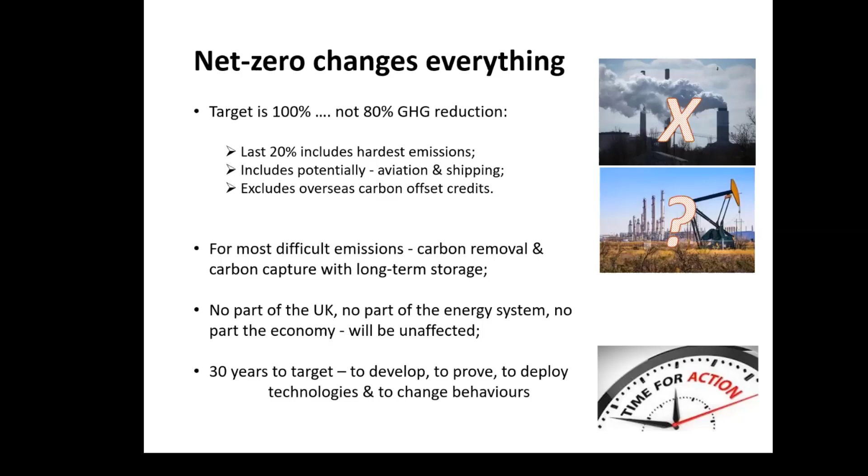And when we talk about the timescales, people want us to act on the timescales of 10 or 15 years. 30 years is not long to act when you get down to it and consider what needs to be developed that's new, what needs to be proven before it's deployed, the scale, the range and cost of the deployment, because it's across the whole economy, and what will be required to change people's behavior. So let's just look at the nature of the problem. A few facts and figures: we've made much progress.

The greenhouse gas emissions, this is all the emissions, but put in terms of million tons of CO2 equivalent, have been reduced by about 44% since 1990, when we started counting these things, from about 800 million tons to the current 450 million tons. The old target was an 80% reduction, about 160 million tons of CO2 equivalent. The new target is net zero. That means either no emissions, or where there are emissions, having countervailing emission removal, where you have negative emissions to balance this off. So this is a really tough target. There's no margin, there's no bit at the edge. It means zero, and for anything that's left, some negatives.

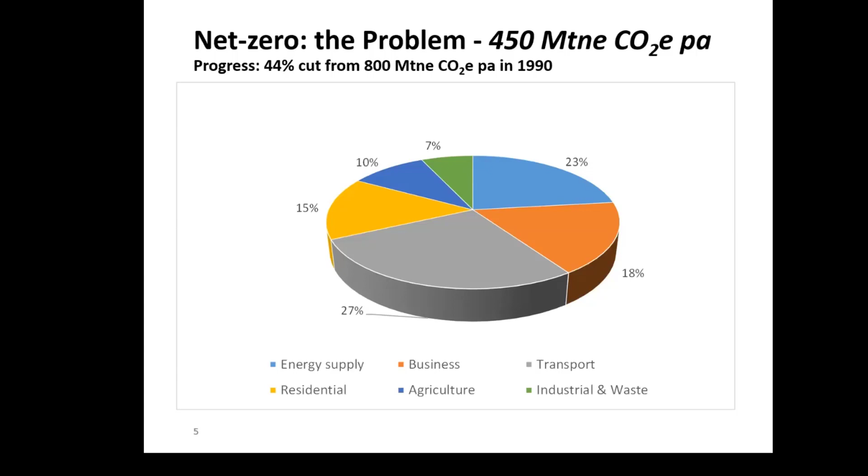So let's just look at some of the sectors. The largest sector, in terms of emissions, is transport, which is cars and lorries and planes and ships and trains. This is the largest, and when people say we'll fix this with electric vehicles, there's a little bit more than electric vehicles to fix. The next largest is energy, which these days is mainly gas. Huge, still about 50% of our electricity is from gas, and this emits CO2. Industry, very important area, because some of the most difficult problems are in industry. Some of the process industries are quite difficult. And here's a picture of a cement making process. Quite a difficult area to fix.

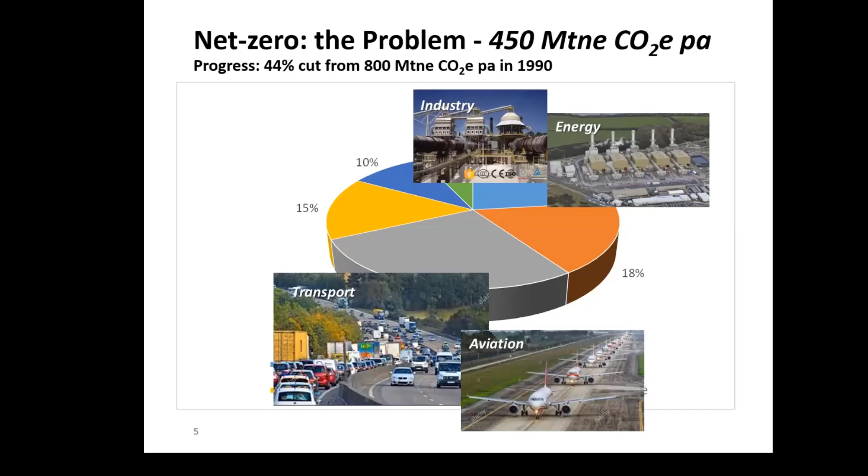There's all the electricity we use domestically and the gas we use domestically and in commercial buildings. These two together add up to a very large amount. It's important, not just electricity, but the heat that's involved in those. And then let's not forget agriculture. Agriculture has emissions as the famous methane from cows, but also fertilizer, and also tractors and transport and heating and all the processing that goes with it. So agriculture is also a big affair. So net zero applies to all those. It's not just about electricity. It's a very big subject.

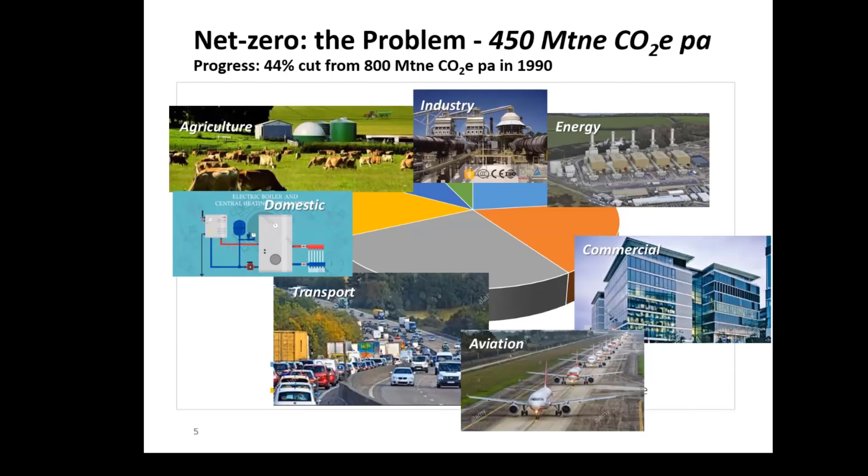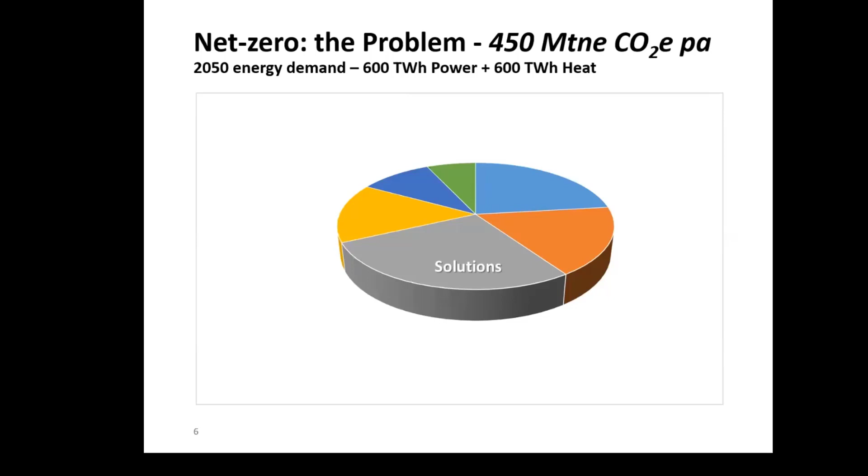Luckily, we have some solutions at hand. It's not all doom and gloom. We have a palette of technologies available, much talked about: hydrogen as a possible carrier of energy, which can be made by electrolysis, splitting water, or by steam methane reforming, which is effectively splitting methane. So there's a large-scale industrial process which is possible.

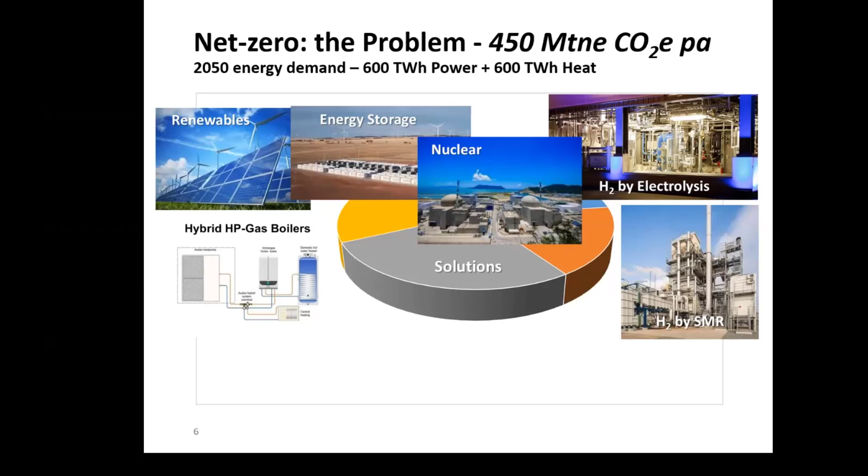There's renewables, talked about today, solar and wind, and probably energy storage, and nuclear is another clean energy source. For heating, heat pumps need to be thought about, and gas boilers, perhaps replacing gas boilers with hydrogen. And then for transport, the famous electric vehicles. And then what are we going to do for trucks and trains? People advocate we should have hydrogen trains or hydrogen trucks or electric. So this will progressively affect a large area of the economy.

So what do we expect 2050 to look like? First of all, energy efficiency measures will be widespread and successful. We need all of our power from clean sources. Natural gas will be replaced by hydrogen or heat pumps. Surface transport will become either hydrogen or electricity. Ships will be powered by ammonia or hydrogen, and bio or synthetic fuels for aviation. And CCS will become important for specific industrial processes.

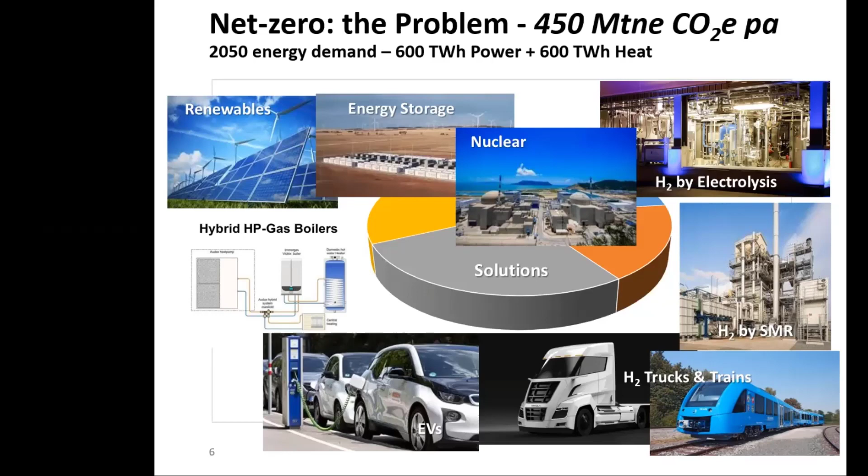This is too big a topic to talk about this evening, but I want to talk about three what I call strategic challenges, where there are quite big questions that need to be answered, the future is not quite certain, and they need some evolution and some decision making. The first one is about heating and hydrogen. The second one is about the role of carbon capture and storage. And the third one is how do we keep the grid reliable with lots of renewables. I'm going to go through each of these in turn.

So first of all, heating and hydrogen. Hydrogen is a front runner, both for heating and for transport, to replace oil and gas. The question is, how much of it do we need? We know it's a flexible energy carrier. It needs to be made. This requires energy, and it needs to be transported.

Potentially, we can make use of the gas grid where it is plastic lined, but it will require some changes to the local infrastructure, which is not all plastic, and definitely into the houses, and then changes to appliances where it is burned. This means digging up many, many roads. It means changing tens of millions of homes and offices. But it looks like this is a feasible thing to think about.

The current UK hydrogen production is about 27 terawatt hours. We usually talk about kilowatt hours or maybe megawatt hours. Electricity bills are in kilowatt hours. 1,000 megawatt hours is a gigawatt hour, and 1,000 gigawatt hours is a terawatt hour. So we're talking about a million megawatt hours. Currently we make quite a lot of this by the industrial process of steam methane reforming, mainly on Teesside at the old ICI place.

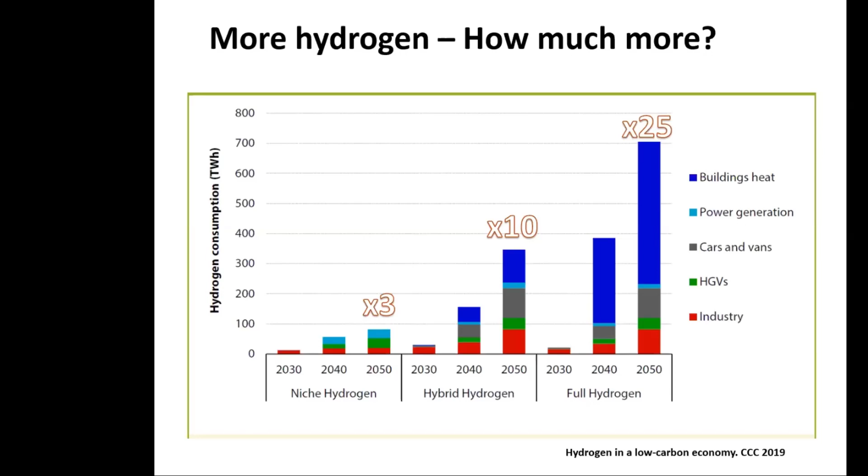A rather complicated slide here, but it intends to make a point. Heating is the biggest use of energy. In the future, it'll probably be about 600 terawatt hours, half the total energy use. It's a big number, and it's a big carbon producer at the moment because it's nearly all natural gas. So how do we do the heating job? Well, there are 3 choices: so-called blue hydrogen, green hydrogen, and heat pumps. Let me briefly go through each of those.

Blue hydrogen is taking natural gas and breaking it down in a methane reformer, heating the natural gas up and injecting steam at several hundred degrees centigrade with a catalyst, and it breaks down to CO2 and hydrogen. It's about 70% efficient. We know it works, and we know how to do it. It can be supplied through the gas grid.

It can be used for transport power, but needs some cleanup because, particularly for fuel cells in transport, they don't like methane. But it does require carbon capture and storage, because otherwise you have exactly the same CO2 emissions as you would if you burnt it in the house.

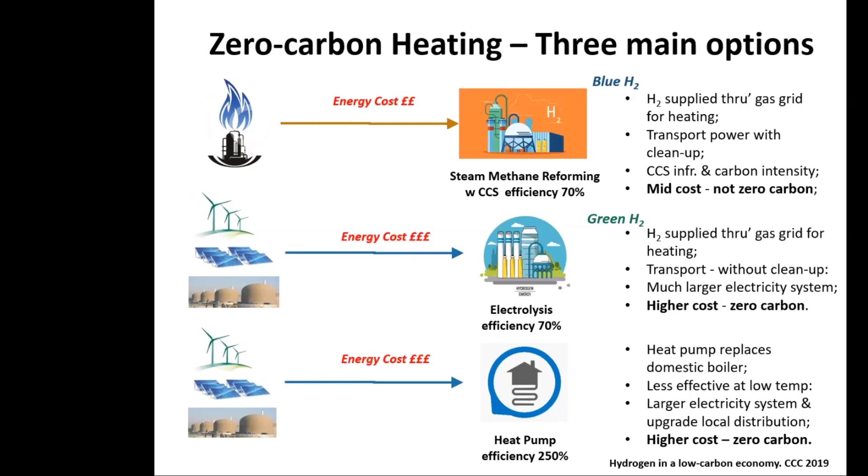Now, the real question is, there's these three ways of doing it. I don't think there's anything novel in this. People will agree these three ways of doing it, but we do need to decide because it has an effect on the infrastructure. Are we going to dig up the roads to put new cables in? Or are we going to remove all our substations to put more power into houses? Or are we going to dig up the roads to put new hydrogen pipes in? Are we going to do both of these things? And who's going to invest in all these infrastructure changes unless there's some clarity about what the right solution is? So that's the first thing to be thought about.

Secondly, carbon capture and storage. Again, people talk about this and are very enthusiastic about it, quite rightly, but it has its problems. So I think net zero, achieving net zero, will depend on having carbon capture and storage. Perhaps not in the way that many people think about it. It will definitely be required to remove and balance difficult greenhouse gas emissions.

The graphic here shows the general form of it, that in this case, what we call post-combustion, so you have CO2 in the output of some power plant or industrial plant in the flue gas. It's then captured by some process, some reversible process, which captures the CO2. The CO2 is then stripped up from the reagent that captures it, pumped up to high pressure, transferred and stored underground.

It's a well understood process. It's not a new process. However, it's got quite a number of steps. There are basically three main applications for carbon capture and storage.

There's direct air capture, which is taking the 400 parts per million we have in the air and capturing it and putting that underground. This is directly acting on the past history of climate change. There's bioenergy carbon capture. This is burning a natural fuel which has already got carbon that's been grown in naturally, which is captured from the atmosphere. They're called BECCS. And there's carbon capture for normal energy back on the back of gas turbines, on the back of steam methane reformers.

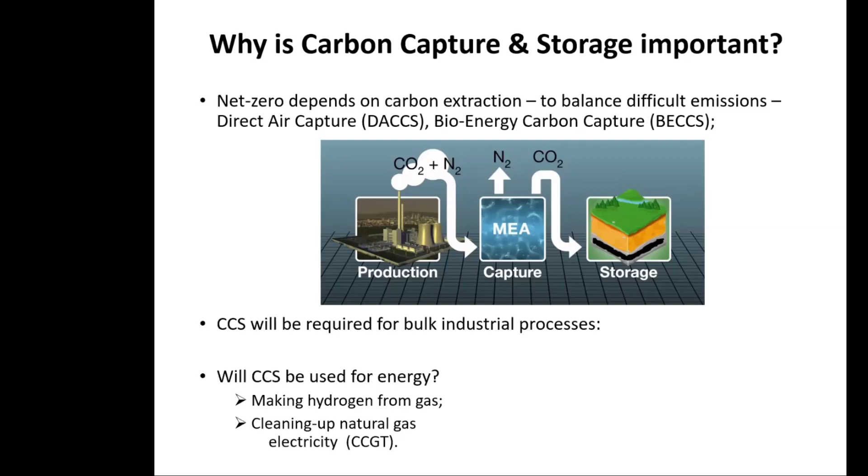And the real question is, will it be used for later use, making hydrogen from gas, or cleaning up the natural gas power? Now in the UK, we have a slightly tortured history with CCS. We've tried, some projects have started and stopped and started and stopped. But there are some examples of this around the world.

There's about 22 large CCS projects. They're mostly, and this is a picture of one in Texas, Petra Nova. It's on the back of a coal-fired power station. And they've got the wonderful ways of having captured the CO2. They put it back into the ground, into oil wells to drive out more oil. So it's called enhanced oil recovery.

And therefore, this looks economic because it's a retrofit of a plant and it produces more oil. But it's not really a net zero technology, because we wouldn't be burning coal in the first place. And secondly, we don't want to get more oil out of the ground.

Many more are being planned in a number of countries. And the current performance of these plants is they get about 85 or 90% of the carbon dioxide out of the plant. There's a theoretical possibility of getting some more, and with a completely different process of capturing it before you burn it, such as the Allam process, you can perhaps get as much as 100%.

But the main issues for carbon capture and storage are cost and residual emissions, as you might expect. Currently, the cost of adding CCS to a gas turbine puts the energy cost up by about 40%, and it's slightly more if you're talking about the Allam cycle. But importantly, if you put CCS on a biomass plant such as Drax, which burns wood pellets, the cost has been estimated by BEIS to be very much higher, perhaps 200% more than this. So that's a cost problem. They have a cost problem.

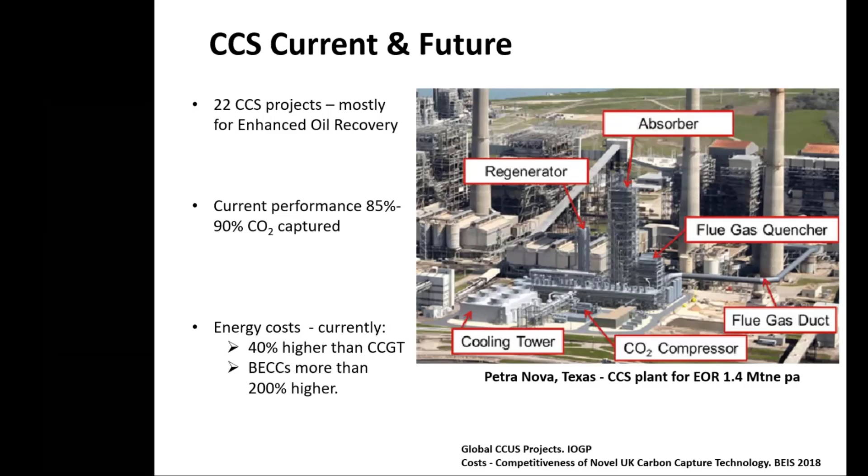Now to perhaps explain the other one, the residual emissions. They come in two parts, but here's a nice little graphic from the Climate Change Committee. On the left, this is using CCS associated with producing hydrogen with steam methane reforming. And on the left, you have the intensity of natural gas, and if you do no CCS, it produces about 200 grams of CO2 per kilowatt hour.

And then there's a funny box on the top, and that is what they call the upstream emissions. They're mainly methane, but methane has a very strong global warming effect, and the small emissions of methane push that up to about 250. If you put carbon capture in this system, it will bring down the process emissions to figures like 25 or 50 grams per kilowatt hour. So it's a big change, but those upstream emissions then become key.

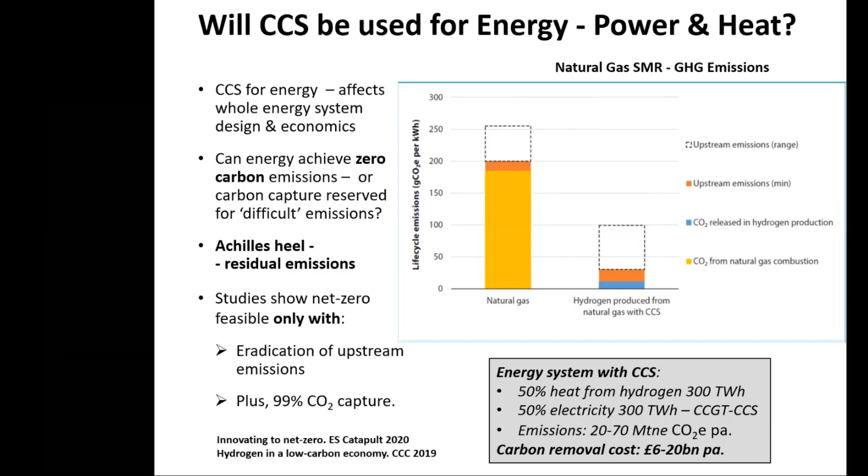These residual emissions are the Achilles heel in a system where, because there are other hard-to-abate emissions in the economy, the energy process will have to be zero carbon. Studies have shown that if we want net zero, it's only feasible if we completely eradicate these upstream emissions and we get to 99% carbon capture. And that's not currently where the technology is.

So thirdly, windmills and solar. On the basis that 2050 electricity supply is completely carbon free, we can see why the government has made its aim for the UK to be the Saudi Arabia of wind. We have plenty of natural wind resources, and it is, at least at the point of production, carbon free. Also, the falling prices of wind and solar over the last 10 years mean it's highly investable, it's becoming cheaper and cheaper, and it will become the dominant means of supply just because of market forces.

It seems that to meet the demand for energy in 2050, we'll go from wind being about 20% of the current energy demand to about two-thirds of the larger energy demand which might be present then. This is probably a seven-fold increase. Instead of figures like the current target of 30 gigawatts of wind going up to 40 gigawatts, as announced by Boris today, we'll probably actually need about 100 gigawatts of wind and 100 gigawatts of solar to meet two-thirds of the power requirement then.

But these are promising technologies. We have demonstrated them at scale. There are some challenges in those. We know demand varies, we know supply varies because it's weather dependent. We've got the issue of lack of coincidence in time of supply and demand, and the issues of grid stability, to do with what's going to stabilize this system. These are largely going to be replaced, or may turn out to be inadequate. For short term, we currently have spinning reserve of turbines, CCGT and nuclear turbines. If we're not going to have gas and gas turbines, that spinning reserve will go.

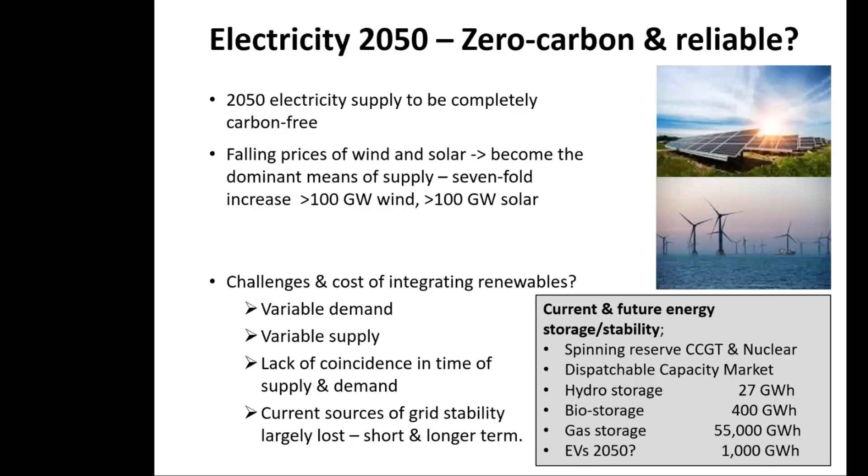People say, well, what about electric vehicles? If we make use of a portion of the energy from all the electric vehicles in 2050, it's about 1,000 gigawatt hours. I don't think this is going to be enough. So I just want to deal with these two issues: the mismatch of time and the business about the weather.

This is a chart which we produced as part of this Royal Society work, and it's quite instructive because it's not a problem we can avoid. So for this, if we say that the demand is about, on average for the year, about 600 terawatt hours, which is a central assumption, we know this varies day to day, week to week, month to month, and season to season.

And if we have a wholly or largely renewable energy system, we know the characteristics of it will mean that sometimes there won't be enough demand to absorb the supply, and therefore there'll be energy wasted. And at other times, there'll not be enough supply to meet the demand, and therefore there'll be a gap.

What we find is, just because of mistiming, that if demand is 600 terawatt hours, and if the supply is less than about 300, nearly all the energy is absorbed. But as one gets towards the 600 terawatt hours, the curve turns over. And although you have nominally 600 terawatt hours of supply and 600 terawatt hours of demand, because of the mistiming, you're short of something over 100 terawatt hours in the year. So this mistiming effect is important.

People say, well, we'll just solve that by having a bit more supply and wasting it. But actually, because the curve turns over, you need to go up to perhaps 3 times the nominal demand, at great cost. Or you have to have some dispatchable complementary supply, the thing that gas turbines do at the moment.

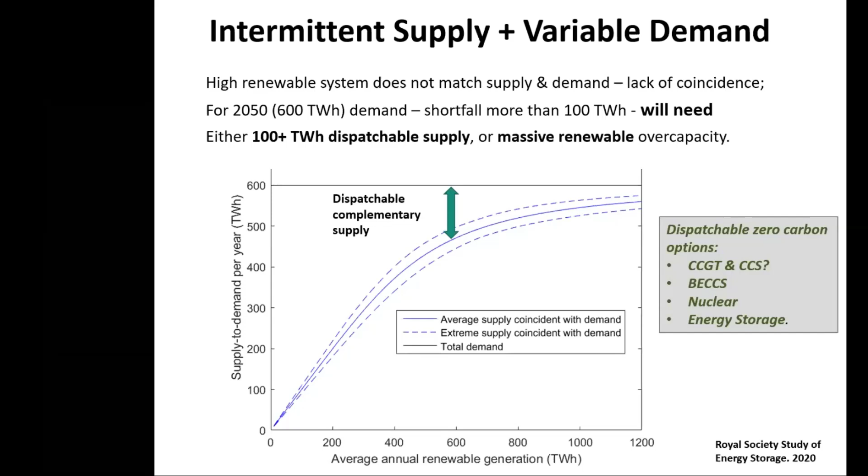So just to go on to energy storage. Now, people, when they talk about energy storage, and I read in the paper, they equate this with batteries. You know the price of batteries is coming down. So if it's all batteries and the price of batteries is coming down, the problem will solve itself. Well, it's not all batteries. Energy storage has a number of technologies, and that's the review we've been doing, to look at the scale of the need and the duration of storage and the type of technologies required.

And really, there are 3 different types of technologies. There's electrochemical, which are batteries, either static batteries like Li-ion batteries or flow batteries. And here we see the largest battery in the world. This is the Tesla battery in South Australia at Hornsdale, 150 megawatt hours of Li-ion battery, stabilizing the grid in South Australia. Everybody's very proud of that. Installed in about a year, a great success, but it's relatively small.

Then for bigger stores, we have things which depend on physical principles, generally compressed air or liquid air or thermal energy. There are a couple of large plants in the world, one at McIntosh in the USA in the state of Alabama, using compressed air, and another one in Germany at Huntorf. They have demonstrated that storing high pressure gas at about 80 bars in salt caverns well below the earth is a good way of storing energy. These things have worked well for a while.

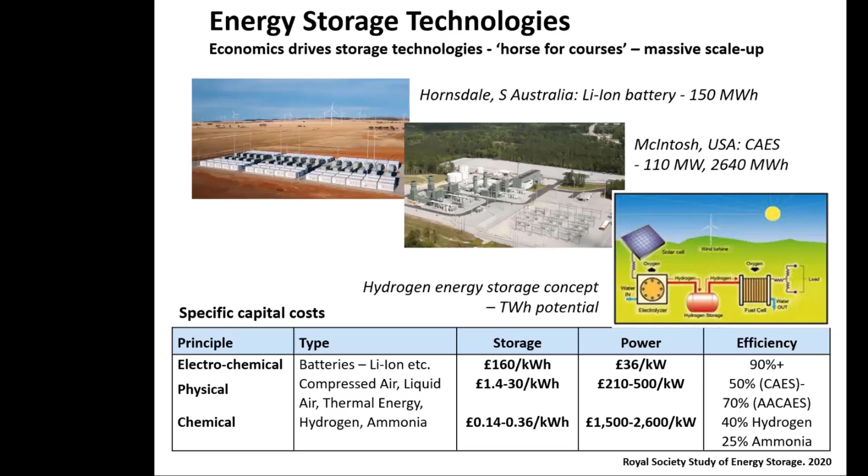So what we see is no one storage technology can fill the whole of the need, and therefore we need to think about how we design an energy storage system.

I think for the first time we've been doing this work looking at many years of weather - we've looked at 37 years of weather and a number of stores working together to find out how to minimize the size of the storage and how to make it most economic.

What we find is if you just have a simple store to fill that compensating gap, it's huge in its requirement - 238 terawatt hours, which is about 100 times all the energy you could store and make available in electric vehicles in 2050. This is just an unmanageable amount of energy in batteries.

Luckily, we find that a small amount of overcapacity in the wind system at least halves this thing. It brings it down to about 90, or something less than 100 terawatt hours.

However, once we put efficiencies into these three store systems, we need larger amounts of overcapacity to balance it, but we can get down to about 60 terawatt hours with 30% overcapacity. There's scope for further reductions by having some base load of something else like nuclear or BECCS, and also interconnectors with the rest of Europe have an effect.

But what we see quite clearly from the data is there are three different types of needs. There's a short need of about a day to cover variations in demand during the day and variations particularly in solar. This has a size of about 100 or 200 gigawatt hours, and that store operates 30 or 100 times a year.

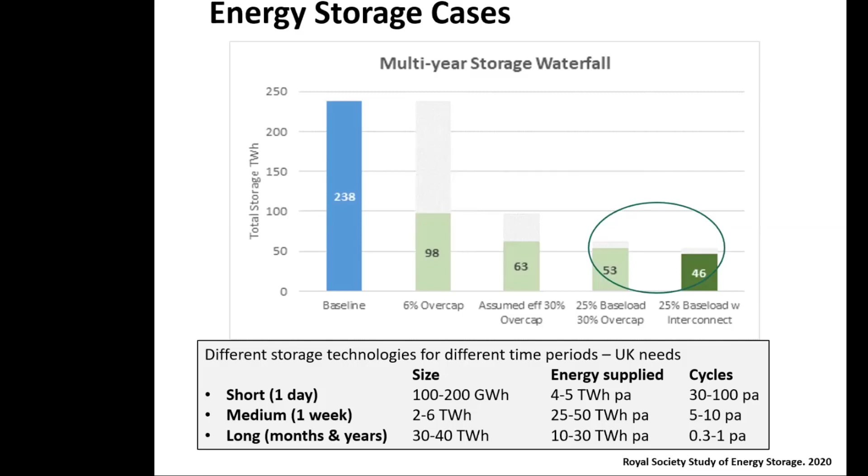So what does all this have effect on energy cost? Again, this is what we've been doing. When people compare technologies, they very often talk about the levelized cost of electricity - the levelized cost of electricity of CCGT, or nuclear, or this technology or that technology.

What we say is for a renewable system which needs storage, if we put all these things together we get what we call a blended energy cost - the renewable cost, the overcapacity cost, and the storage cost - and we work out the levelized cost of all these things.

Now for this modeling we've not used any random figures - we've used absolutely standard figures. We use figures for the cost of renewables in 2040 from the International Energy Agency. And when you blend these things together, they have an average price, a future price of about £50 per megawatt hour. This is the green line.

We used for renewable energy costs, for storage costs, those produced by the International Renewable Energy Agency, IRENA, again published. And the problem about those is they're quite a wide range because they're not as well studied and not characterized and built as others.

But what we see in this graph is the base cost of this system is the renewable energy, and then as it's plotted against overcapacity. If you have a bit more overcapacity, it goes up. But putting more overcapacity makes the stores smaller and should make the cost lower, but actually it perhaps doesn't.

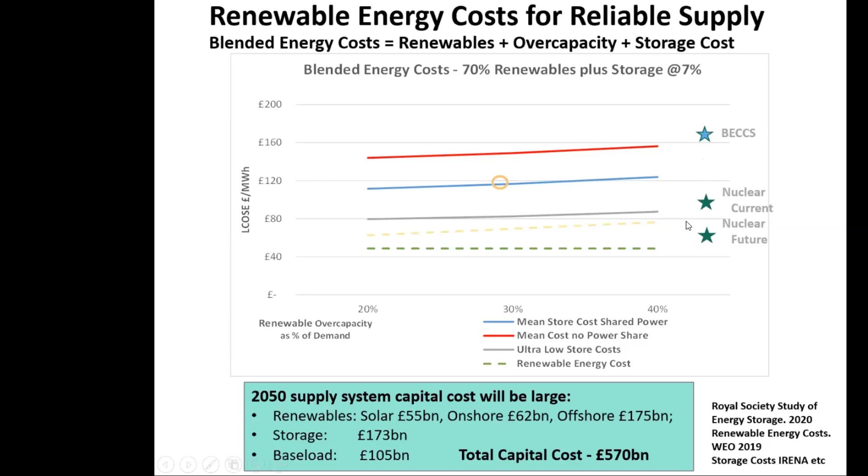We have also found that bringing some base load in does reduce the overall cost of energy. And so on the side, we show up here some examples. BECCS is rather expensive. It's more expensive than this combined renewable energy. Nuclear looks like it could well be lower, and therefore having a nuclear component will reduce the overall system cost.

So getting to the end, I think I've argued, and I'm pretty convinced, net zero changes everything. It's not just more of the same. It's going to change the energy industry, and it will affect the whole economy. It'll get into areas that we have not really thought about. There are some major developments and some major decisions to be made.

We've got to decide for heating whether we can use hydrogen or heat pumps or what combination. We have to decide something about CCS, whether to use it for energy or not. It will be used for industry, for things like cement and steel and glass making, where there's almost no alternative. We will have a highly renewable system, but what is it going to look like? And is it going to have energy storage, and how much base load does it want? But what we do know is the scale of change is unprecedented, and it would lead to a novel design of systems.

The energy investments are massive. You may have noticed figures as I was going through, but if you start and add these things up, the investment is huge. You have to invest in renewable energy supply. We're talking about 100 gigawatts of wind and 100 gigawatts of solar. For CCS in industry, biomass and DACs, direct air capture, it's expensive but probably required.